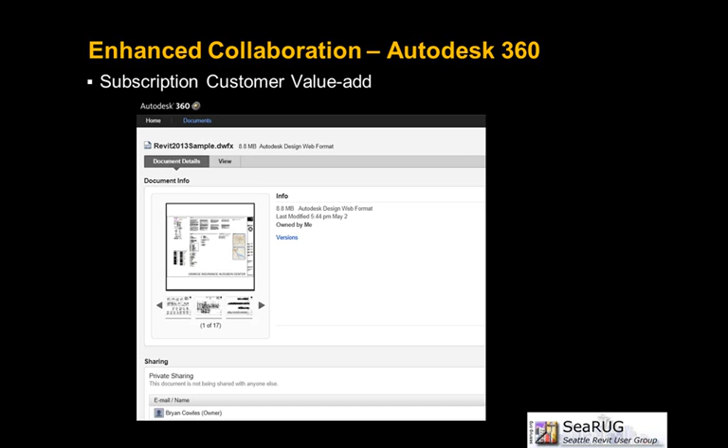Now, what 360 does is it's a place for in-the-cloud file sharing and storage. This can be most file types, and a good amount of the Autodesk file types have viewing capabilities where you can open it up and it will be a DWF. You can zoom around, pan around. If it's a 3D model, you can actually orbit, select items, get properties from it. But it's all in a nice online read-only environment.

You can also do markups. They've tied in some of the design review capabilities into 360, so you can mark it up there, and the markups get saved into that file. You can download the file, link it into your Revit drawings or your AutoCAD drawings—is that a bad word?—and do the markups, then re-upload a new version of that file. Also, it's tying into Autodesk's cloud services.

If you're using 2013, you may notice there's a few new options up in your ribbon: render in the cloud, analyze in the cloud. This is so you can send your information up to Autodesk's big supercomputer and get your information back in a fraction of the time, and you also have the option to post it up there. Now, I do want to point out that the data speed is a little bit slower, and it's also not live. We'll see how well the internet behaves here.

So this is Autodesk 360, if you've never logged into it. It's a web page.

We've got this splash screen here, which shows everything that has happened within my environment—when someone has shared a file with me, uploaded a new file, or when I edited some markups yesterday and uploaded a new version. When I post a DWF, it gives me thumbnails I can click on to start viewing. I can also access my 360 renderings, Green Building Studio, and my design studio analysis reports, which all get posted up here too.

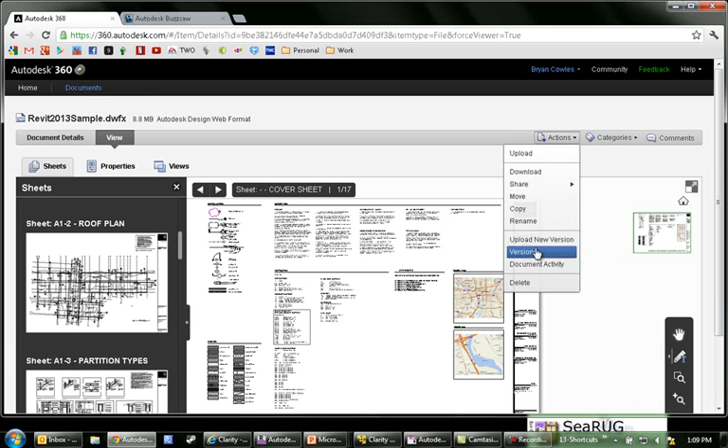Now as you're going, notice I can upload a new version, download this, or pick who I want to share it with. I can also come back to my documents—this was one of my favorite features.

If I go here to my Revit file, look right here under versions—it's tracking how many times I've uploaded and changed this file. I can upload a new version, but I can also revert to a previous version. So if you saved it Thursday night and someone Friday morning opened it up, made a mess of it, and accidentally uploaded it, you can revert back even if you don't have backup files readily available.

So that's just a really quick look at 360. We'll dive into more features of 360 that are also in Buzzsaw—I just didn't want to take all the flair out of Buzzsaw here.

So 360 is really a cloud-based tool that you use to manage your own files—that's the key there. Now Buzzsaw is built on similar technology, but is more for project management and file access.

This allows you to exchange your project documents, designs, models, and any other data you want, and centralize your information according to groups and companies, assigning permissions to projects so you can only see one folder of files, or maybe only a subfolder within that folder. You can then assign read-only access, read-write access, or download access.

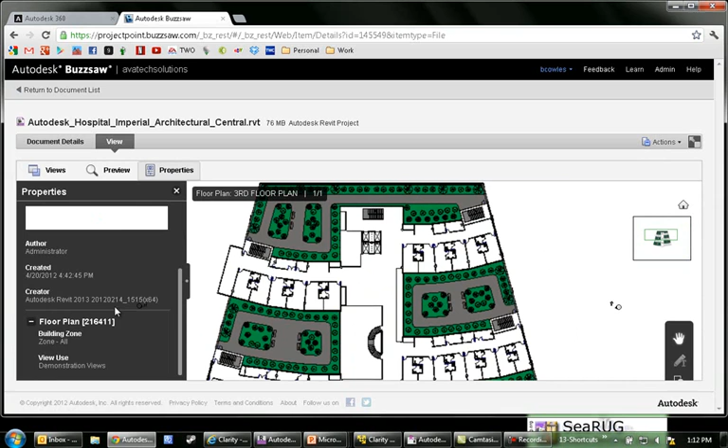So here I can look at floor plans, ceiling plans, elevations—these are the actual views from the model. I could come in and click on this third floor plan, and right here is where you go to interactive view, where once it prepares my viewer you can zoom in, take a look at any properties of this object or file, and start selecting objects.

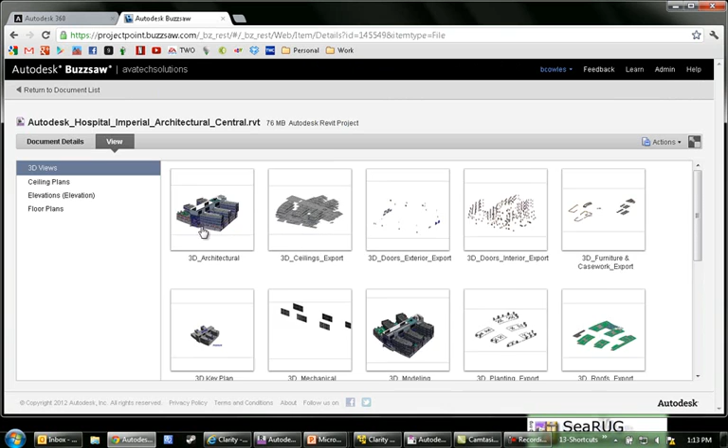Now I'm actually going to back out a little bit, back to my document list, because I find this much cooler when I'm actually in a 3D view. So these are all my 3D views. Now it does capture your visibility state when it creates these. So you've got a bunch of views here. Now I found this 3D architectural one's the coolest one, but it takes quite a while to load. So I'm just going to grab this exterior walls model.

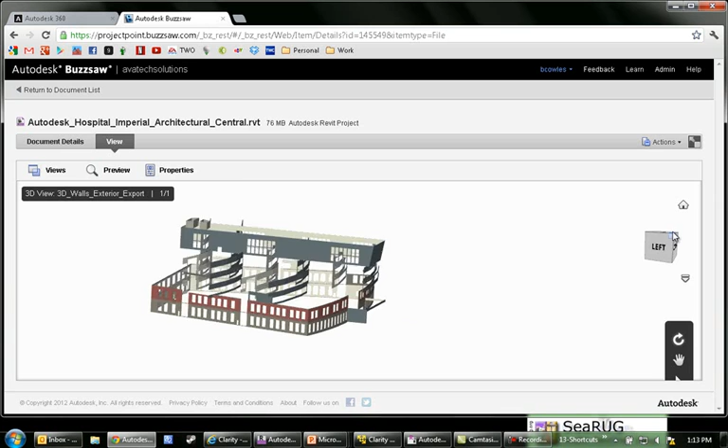And you see here I can look in here, but if I switch it to interactive mode, this again is utilizing the DWF viewing technology that they've now made mobile. So there are mobile applications for Buzzsaw, so you can access all of this on your tablet or your mobile phone. I can actually now come in and use my little view cube, come around and start doing some navigation here,

spin things around. Again, I can activate the properties, and as I start selecting items, it's going to start listing these Revit properties. Again, giving people access to this data that you don't want in your Revit models. You don't want them opening Revit. But it's all here, it's all active and easy to find and navigate through.

So that's a really quick look at Buzzsaw. Again, that is more for project management than 360. I find more for internal file management. Now, this tool is great. I just got back from Autodesk Tech Camp last week, and they delivered all of the data sets through what's called Buzzsaw Sync. They shared a specific Buzzsaw file with me.

I picked where I wanted it on my hard drive, so I got to choose, and then it's like Dropbox for Buzzsaw. When they posted new files, they just come into my machine. What you do is you find your folder, right-click on it, and say you want to do Buzzsaw Sync. You do have to sign in with the credentials that are given to you. And then you can say, when do you want to update? You know, daily at 1 a.m., continually, that's more like the Dropbox account, or manually. I actually have to right-click and initiate the synchronize.

But it's a really cool tool, and it also allows grouping, permission control, and file access controls. So we could see all of the files in there. I actually could not delete or modify any of the files. Now, when I say that, I can delete the files from my machine, but it doesn't delete it from their Buzzsaw site. But then the next time I synchronized it, it re-downloaded them all. But then you just go in and say you just want to do a manual synchronization.

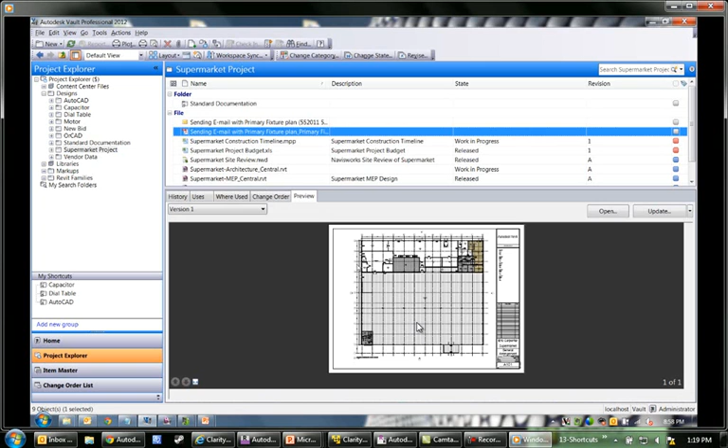So here's some floor plans, PDF, but maybe I just received an email. And in that email there was a specific specification that I wanted. You see, I just went right up to my Vault tools and said, check it in, pick my project, hit OK. When we go back to the Vault, you'll see right away that that email is now attached into the Vault, so I can go get it at any time. The email itself is there, but also any attachments that were in that are also in here.

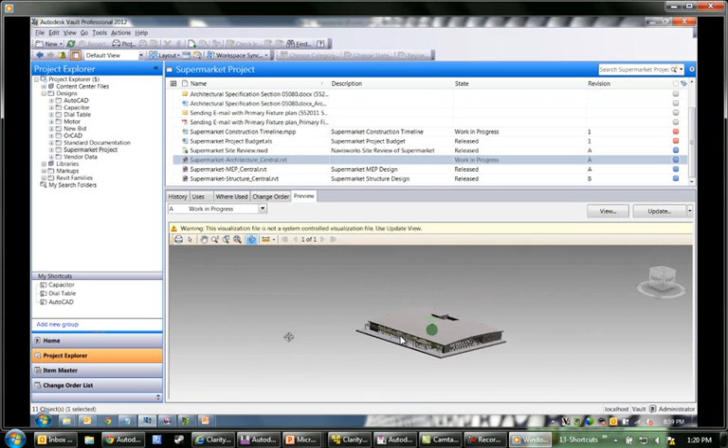Now, most file types are available in the viewer. There's naturally a few that aren't, but the files themselves will still be in there that you can retrieve and open and do whatever you need to. You can also go to Revit files, open them up, and if it went a little bit fast for you, let me back that up just a second. You see it's actually keeping versions. Those were all versions: when they were updated, who updated them, and the file size changes. You have a little viewer in here that you can now explore the model, and then we're going to go ahead and open this model.

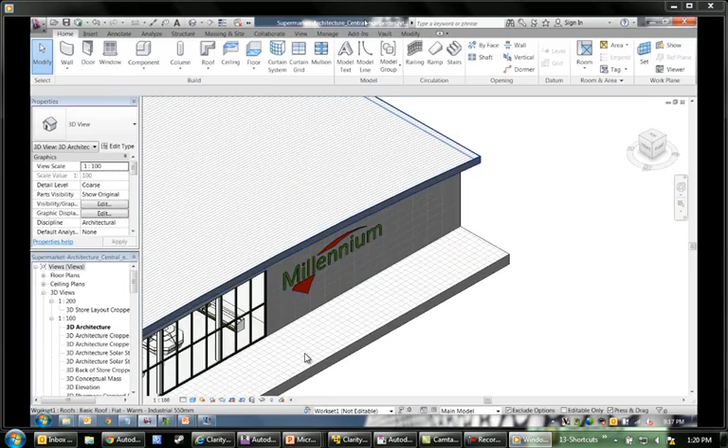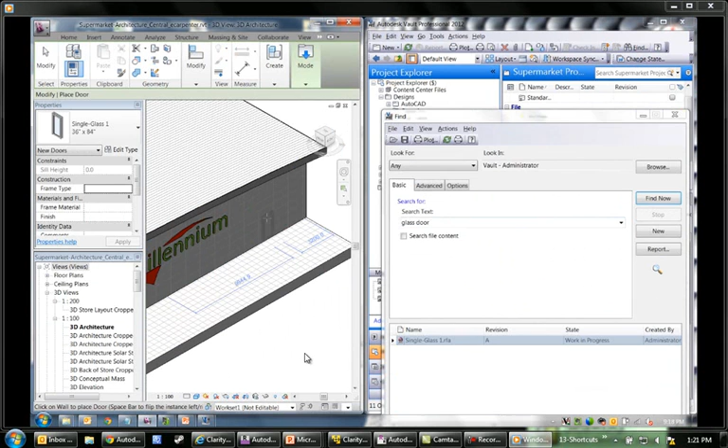So here it is, opened up in Revit. So now we realize, according to code X, we need a door on that side of the building. I know I have in my Vault a library of doors. So I'm going to use my Find tool. I can type in some search text, query out a glass door. Once I find it, notice he's just going to drag it right into his Revit project. The door tool activates, that family's selected. You know, naturally you'd want to be a little bit more precise with your random placement of a door.

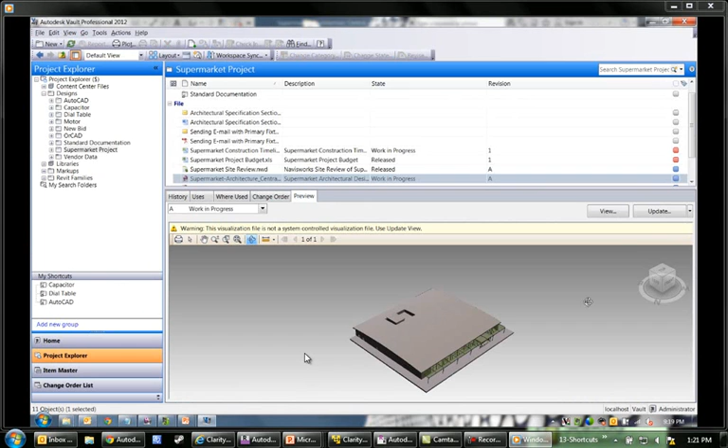But once we synchronize with Central, because we've got this file tied into the Vault, there was nothing really special that we needed to do. We just synced with the Central. If you're using Revit Server, that's fine. It will do all Revit Server's magic, which we'll talk about in just a bit. But then we have a new version. And if we go to our viewer, you'll see right away that our little DWF viewer is now up to date. Once again, these files are getting more and more live with these viewing technologies.

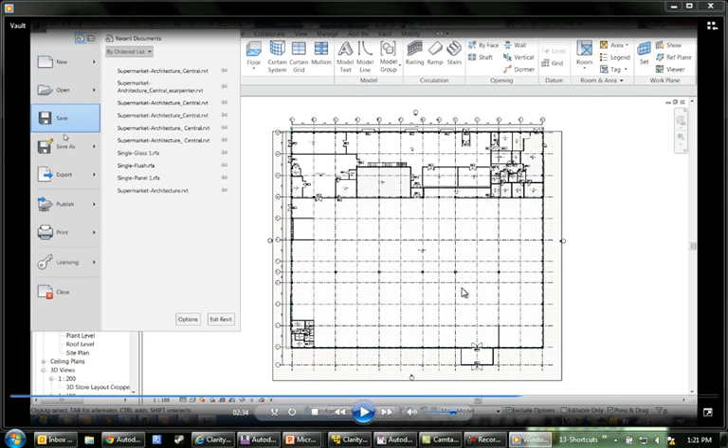This next part talks about exporting a DWG, boo, and then checking it in, also putting it into the Vault. I'm going to skip that little piece.

So that's... Does Vault, is there like a plugin possibly coming to automate bringing content in or accessing through Revit, or do you always have that Vault? The question is, is there a plugin inside of Revit? It kind of works like the old Navisworks plugin. When you install Vault, it looks at all your applications that are on your computer and installs plugins as necessary. Now, there is a Vault tool in Revit that you use to initially sync it with the Vault. Okay, but not like an automated palette that you can actually bring content.

You have that Vault open to bring content? I don't think it needs to be open. If you click the send to Vault or check into Vault, it will then open Vault and do all of that for you. Now there's two parts of Vault. There's the Vault client and the Vault server, I think is what it is. Everyone would use just the client, and the client's a pretty lightweight tool.

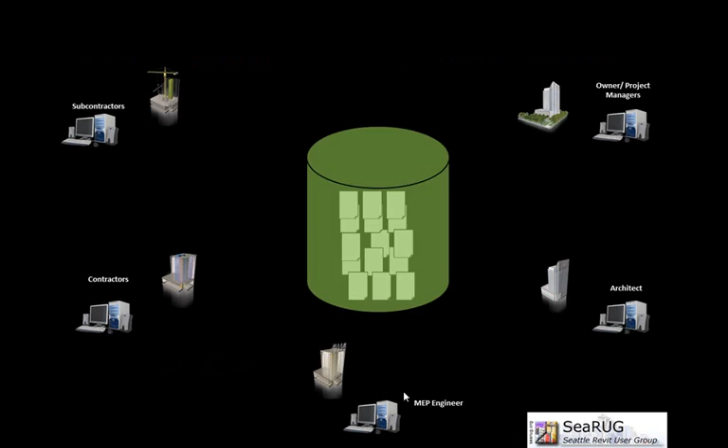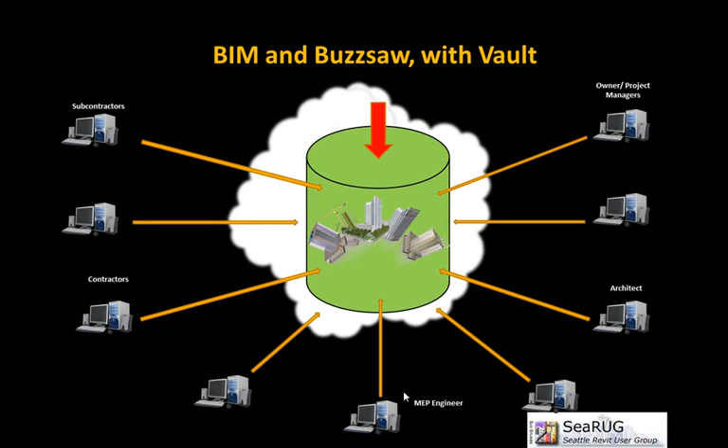All right, so kind of running back on this old slide, we're starting to see everyone starting to put data into this Vault. Now this is where the confusion I had originally between Vault and Buzzsaw. Vault and Buzzsaw, well, what's the difference here? Like I said, Vault I found was mainly for managing your own internal files, their progress, how they're going. Once you want to start collaborating, within Vault there's an upload to Buzzsaw link, and then that's where you can start distributing files amongst extended project teams. So it's all being done up in the magical cloud. Everything's getting cloud computed these days.

It's kind of like an instant messenger for Revit, or for basically Autodesk applications, really. You can link it to your workshared projects, so that when someone sends a request, you'll get the little pop-up in Revit, but also your little Blue Streak will pop up, and then you can actually chit-chat back and forth through Blue Streak and send good information back and forth. So look into Blue Streak. It's a pretty cool tool.

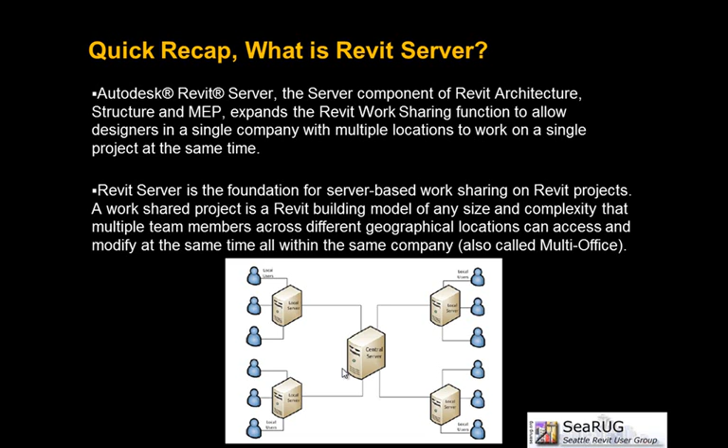So, a really quick example, just a diagram here: there's a central server, and that can be in any of your office locations, but that's where the main file gets hosted, the central file. Then there are what are called local servers, or they've now been dubbed in 2013 local accelerators. They have a replicated copy of the central file. The users do the same things they've always done. Go to that central file, create a new local file, reload latest, check things in, check things out, sync with central. The users don't experience all that much of a difference.

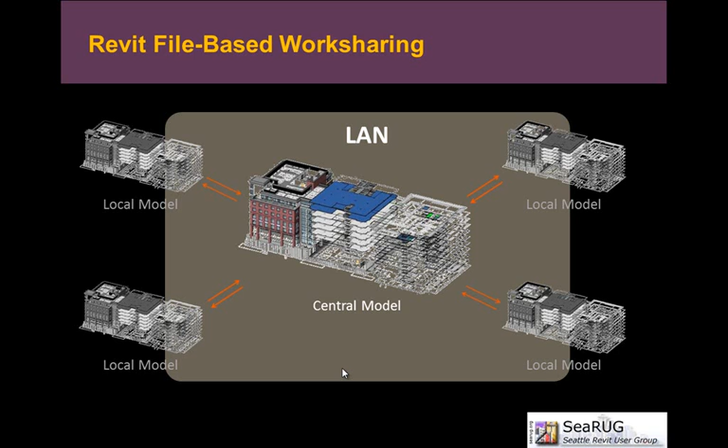So this is how we typically do it in a local area network environment. You know, we're all just kind of sending to and from the central model. In a Revit Server environment, this is now being done over the WAN. So instead of everyone in the same office or remote desktoping in, we have people in, you know, LA, Chicago, Seattle, Kansas City, China, wherever.

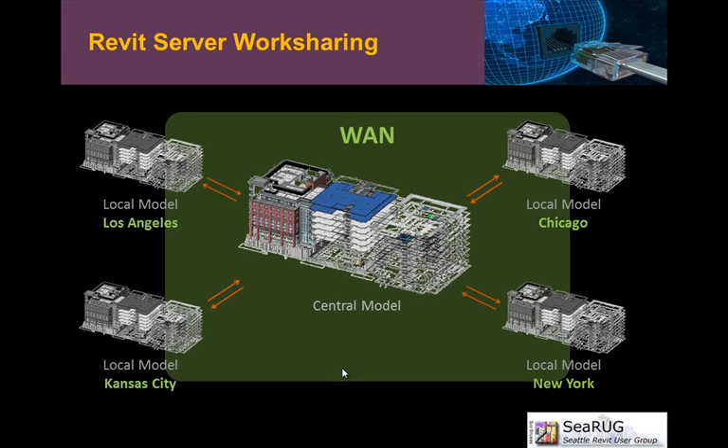So the way Revit Server really works is, again, the central model is located over here on the host. It is being data replicated to these local accelerators. And again, the users create their local model from this local accelerator. They check things in, they check things out, they save their files and sync to central.

Now, the big problem with work sharing across a wide area network when Revit Server is not in use is when you hit sync to central, it's sending 350 megabytes. That's why sometimes your sync to central can take 3, 5, 20, 30 minutes. I've heard stories of an hour to sync with the central file. Now, WAN accelerators help with that, but you're still sending the whole model and then receiving just huge amounts of data.

So what Revit Server does is it uses local area network speeds to send the big pieces. And then it looks at the replication and looks at the host on the central file and says, only these pieces are different. I'm going to only send 2 megabytes. So the way Revit Server really works is it's sending the delta changes, not the overall changes. The overall changes get sent within the LAN. The major data is happening at the fast speeds. The delta changes get sent across the WAN, and they're synced through Revit Server. So it's using your bandwidth more efficiently.

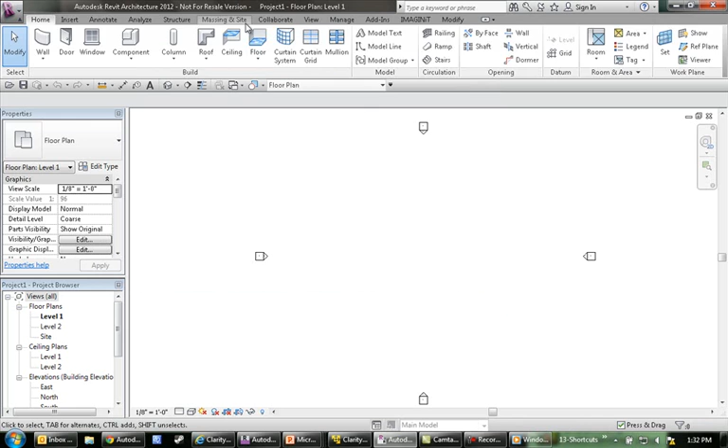And first, on the Collaborate tab, when you've got the Revit Server installed, you'll be able to come right here and say, connect to my Revit Server. You'll need to plug in the IP address, the server name, however you wanted to connect to that. And then the user just simply goes to open, but this time, instead of going to their server where their local or their jobs typically are, the only change they'll really experience is they come down here where it says Revit Server.

There's my Revit Server models. Go to my projects. There they are. If I open up this Grange project, there's my Revit files. I open them up and start running with them.

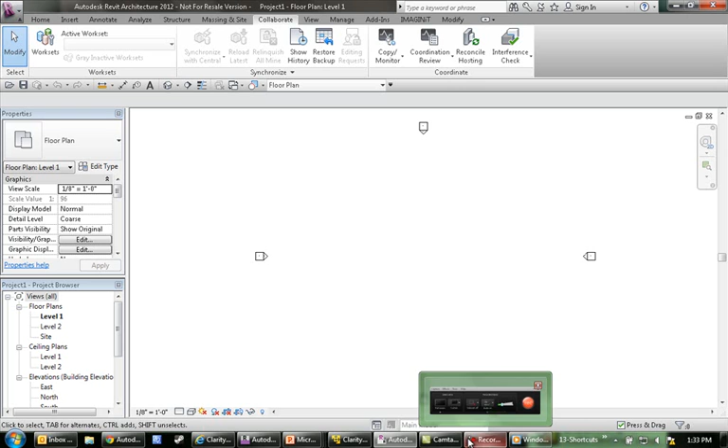Now, a key thing here is Revit Server only applies to RVT files. The RFAs, the RTEs, they all can stay wherever your Imperial library is. But that's really the big change that's going to happen on the user front, is they just need to go to a slightly different place to access those files.

So now, Revit Server is amazing technology, but it does have one big inherent problem, and that is with Revit Server, everyone in the ecosystem will see everything from every project, which is why a lot of people are not implementing Revit Server, because they don't have permission control to say, you're working on Project X, you're working on Project Y, but I don't want you touching Project Y.